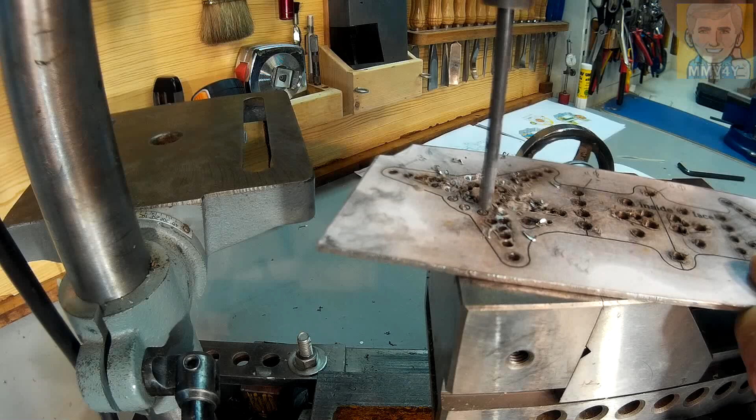This is part 8 of my Speargun project, and on today's video I'll start working on the line reel for the Spearguns. I made this drawing that shows how the reels look, and as you can see, this is a vertical reel and we'll have a drag system to control the tension on the line.

This one here shows all the parts that have to be made, and the first part that I'm gonna start working on will be this one here, which is the frame for the reel. That frame is made from a 2mm thick stainless steel, and this printout is actually a template that, once I cut it and glue it on, will work as a guide for me to drill and cut the final profile. So don't go anywhere, stick around and watch how I make a Speargun reel.

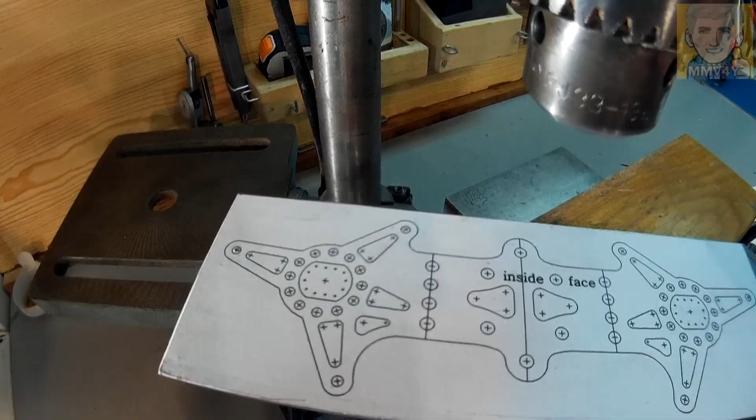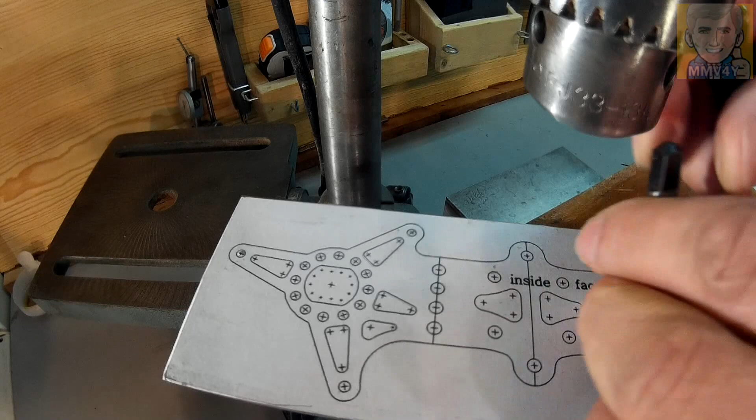Using the drill press machine and this tool that I made from a broken tap, I'm gonna mark the center of each hole before I drill it. Next step will be drilling all of these holes, and to know which drill diameter I should use for each hole, I'll use this drawing.

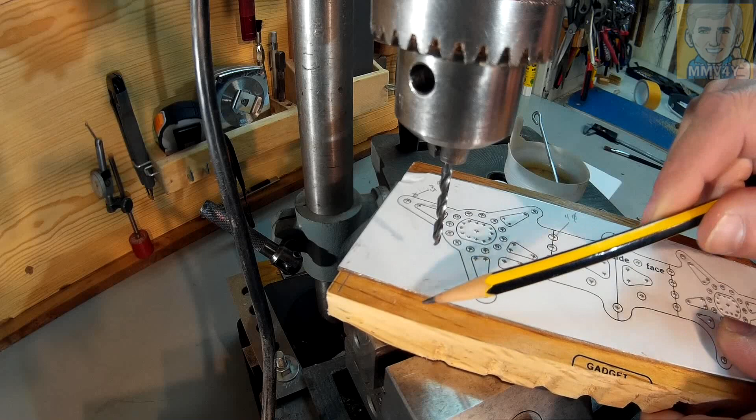I glued the stainless steel onto this piece of wood, and this way it's easier to move from one hole to the next. And because I'm using relatively small diameter drills, this is a 3mm, there's no need to clamp it in the vise. I switched to a 4mm diameter drill to do a few more holes.

Before I do any more work on this piece, I gotta clean up the backside. It's full of burrs from the drill breaking through, and for that I'll use a file and file that down. But before I do that, I gotta remove this double sided tape. If I was gonna do this again, I would just put a little bit of tape on each corner and it would be plenty. Removing that piece of wood was very difficult.

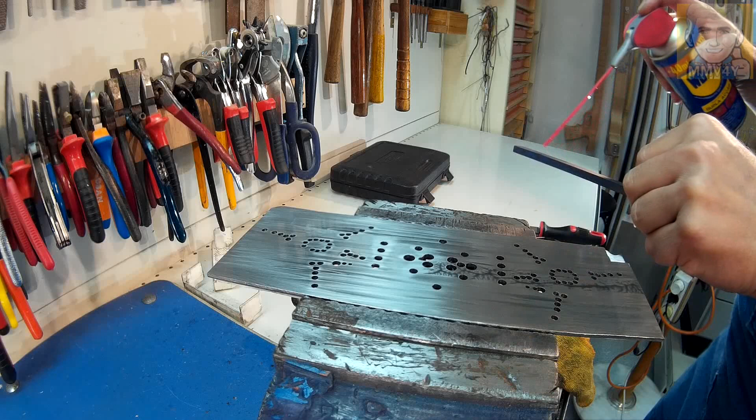So I clean up the back and then I'll carry on and do a little bit more work around this area here. Now with this polishing stone, I remove the rest of the burrs and some scratches that I made by using the file. Well, for now it's good. Let's carry on with the work.

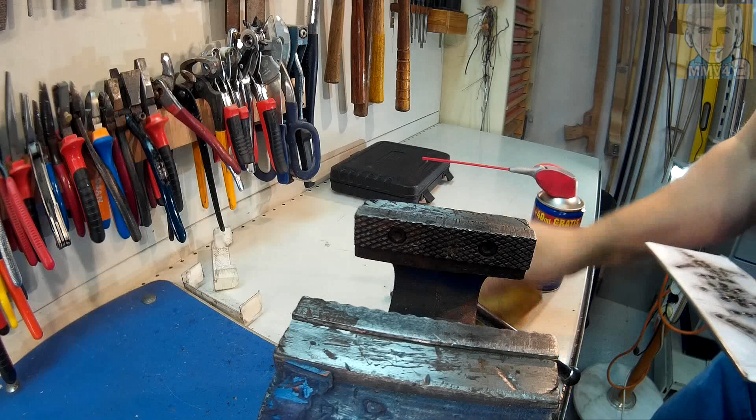Now with this 4mm drill, I'll make these little pockets all the way around. They're about 1mm or so deep and about 3mm diameter on the top. And that's for these pins that the tension knob will have. The pins have a little spring on the back, and that keeps some pressure on the knob and prevents it from turning too easily.

Before I carry on with removing the rest of the material from these areas here, like I already did on this spot, I'm gonna have to make some nylon washers. Those washers fit in this middle hole here and they look like this. Having those washers will make cutting this hole to size a lot easier. I don't have a lathe, but I'm gonna make the washers using my drill press machine.

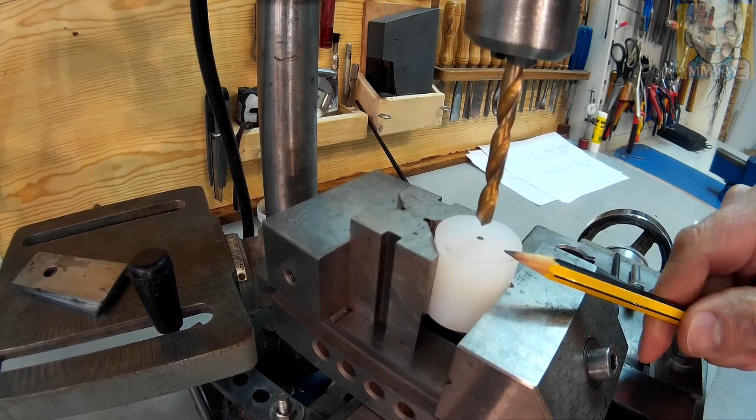I got a piece of nylon, and this is a 6mm drill. I'm gonna drill a hole through and then with the 8mm tap, I'm gonna tap it about 1 centimeter deep, and the idea is to bolt this screw down, and this will be the shank for me to hold it on the drill chuck. So I'll do that, and then I'll set up the machine to start turning this piece of nylon and make some washers.

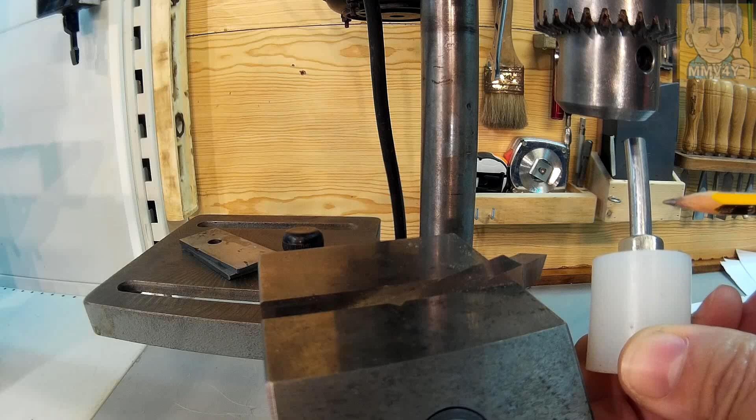And this is the setup to start turning the washers. I got the cutting tool clamped in the vise and the screw bolted onto the piece of nylon. So now I clamp it in the drill chuck. The first thing I'll do is turn the outside diameter to 25mm.

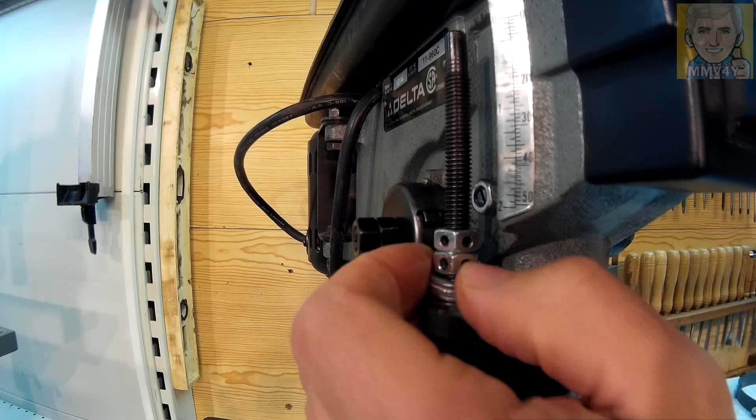Now with the 25mm outside diameter done, I'm going to cut this face, and after that I'm going to cut this shoulder. It's 5mm deep by 16mm diameter, and to help me make this cut, I made this little piece. It's just 3 washers glued together with paper in between, and I made this 5mm thick.

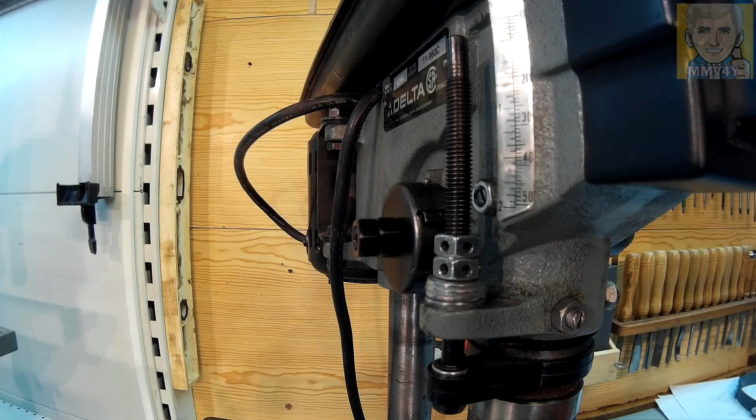This way I place it here, which is the machine stop. I drop it, cut the bottom side, then I remove it, and now I know that the distance from the bottom to this new position is 5mm.

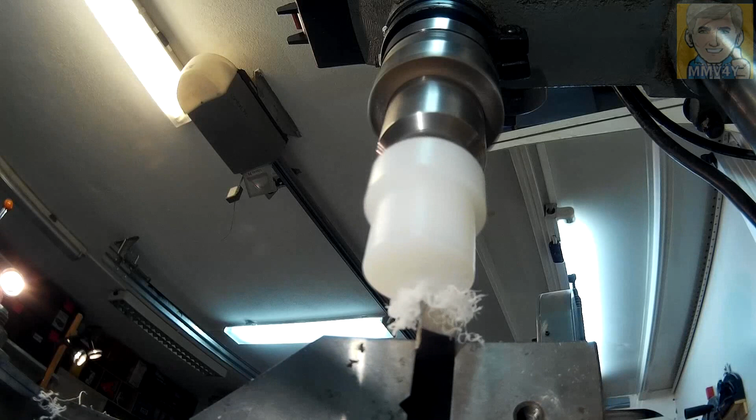And now to cut the shoulder, I remove the washers. And I can start cutting the shoulder. I have 17mm, so I have to take 1 more millimeter. Let's measure it again. And it's right on size.

Now I drop the machine down and turn the machine on. And move the machine back to clean that face. Yeah, it looks pretty good. I don't have a way to measure it here, but putting the washers, I don't feel any step. So I'm on size or very close to size. Now using this small file, I'm gonna just make a small round on this corner here and this one here.

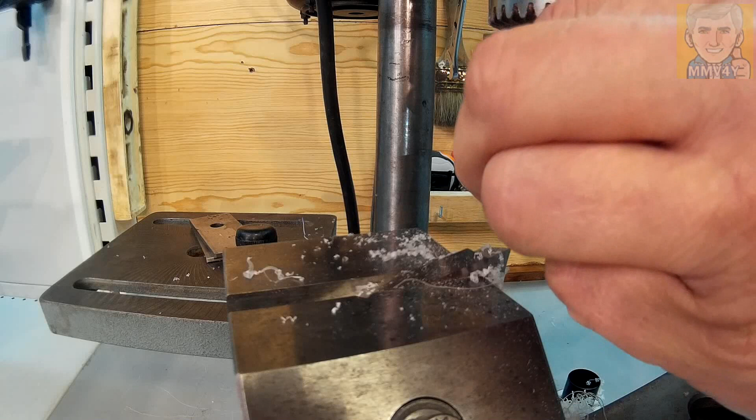There's a few more things to do before the washer is finished. One will be to make 2 cuts, one on each side to create a flat. Then cutting off the washer from this bigger piece of nylon. And the last thing will be to make this hole square, because right now it's 6 millimeters diameter, but will have to be square. But before I do that, I'm going to use the same setup and make another washer very similar to this one, except for this hole in the middle, instead of being square like this one here, is 10 millimeters diameter, and the shoulder, it's only 2 millimeters deep.

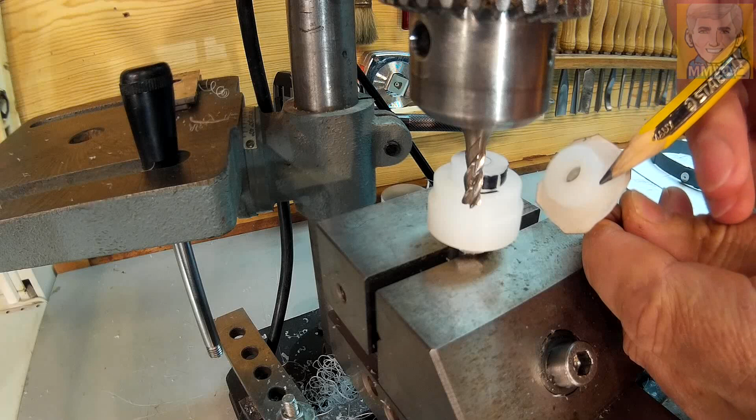Off camera, I made another piece, and now I'm going to cut a little bit on each side to make 2 flats, and after that I cut off the washer from this bigger piece of nylon, like I did with this one here. This one, to make the flats, I have this pin that I'm clamping in the vise, with double side tape to hold it in place. I was getting a lot of vibration and chatter when I was cutting off the washer. So now I'll use this rod to put some pressure on the nylon and this way dampen somehow the vibrations.

It will take some time, but it's working. I had to stop cutting because the nylon was touching the cutter on this ball bearing. This is a cutter to cut wood with a router, but it did the job. And it's so close to break off the washer that now with a small blade I can just cut the rest off. And the rod helped a lot. It dampened the vibrations and the cut was a lot smoother.

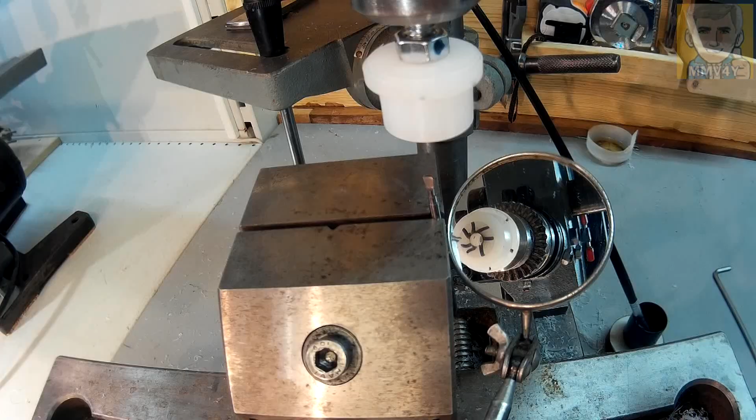Okay, I got the 13 millimeters. Took a little bit of measuring to get the hole in the center, but it turned out pretty good. And this is the setup to cut the other washer, the one with the 10 millimeter center hole and the 2 millimeter shoulder. The outside is pretty much the same except for the shoulder, but this hole is bigger, it's 10 millimeters, and for that I'll use this cutter to cut this hole bigger. And I put this mirror here, and this way I can see and control the position of the cutter.

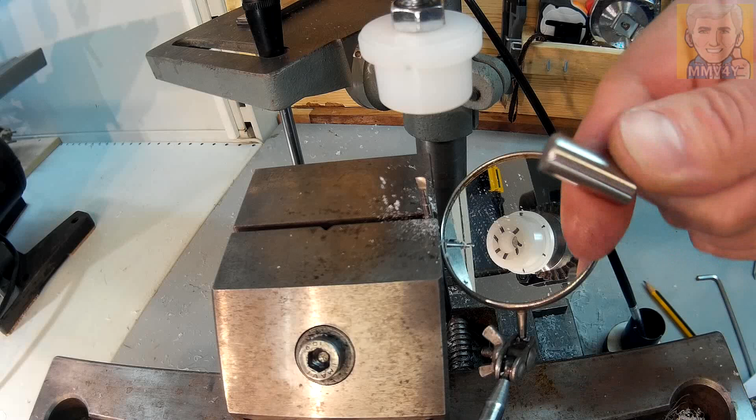Should be very close to size now. I cut a little bit of 10 millimeter rod, and this way I can check the size of the hole. And right now it's still too tight, but it goes in a little bit, so I'm very close to size. I'm gonna cut a little bit more and then check it again. Okay, not too bad.

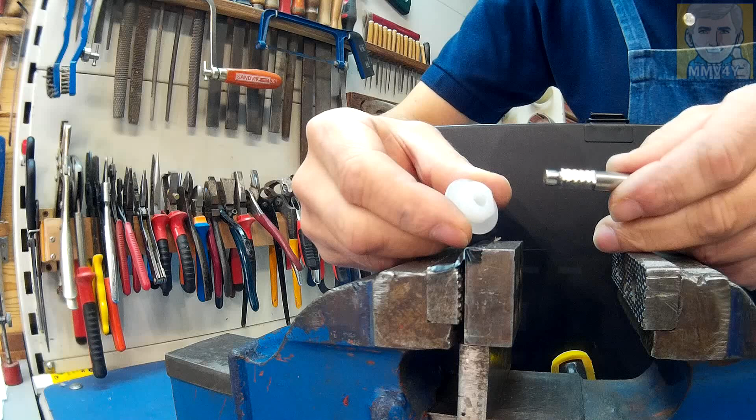There's only one thing left to do to finish up these washers, and that is making this hole square. And for that I made this tool, and now I have to push the tool through the washer, and for that I'll use the vise. Well, it did cut. I can see some nylon shavings, but it's quite tight, so I'm going to remove this and then see how it ends up.

And here it is, from a round hole to a square hole. I measured it and it's very close to size, but the hole is tapered. So now, using the same tool, I'll push it through, but from this side. I have to push the tool in and out a few times from both sides, but now it just goes in very easily. And that tells me that I got the square hole on size, and I got the other washers done too. This is the other one with the square hole, and these two, the ones with the 10mm hole. Overall, this turned out pretty good, and I'm very pleased with the end result.